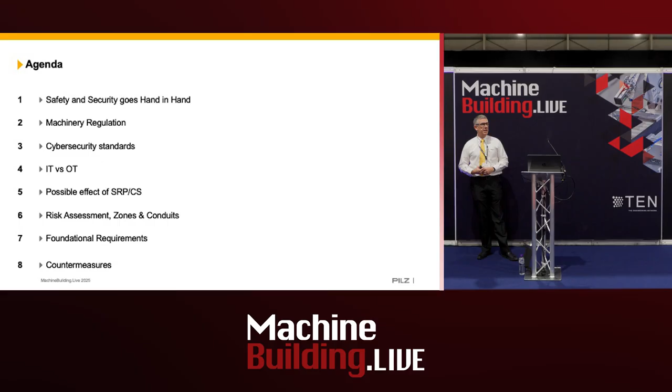So safety and security. Security vulnerabilities really enable machine safety to be manipulated. And we're all familiar with machinery safety and how that protects your staff from hazards due to the machinery itself. But now we need to look at security and protecting your machine and data from manipulation from unauthorized access, so from people.

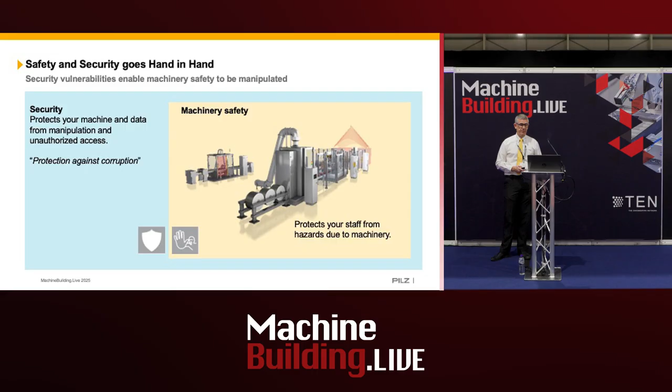And we need to look at security in two different ways. So we need to look at the physical security. So that's protecting the machine from personnel. So how do we protect unauthorized people gaining access to the machine through gates, covers, flaps, or through HMIs, for example. And then finally, we need to look at information technology security, which is protecting the industrial devices and data from attackers. So, for instance, from outside attack.

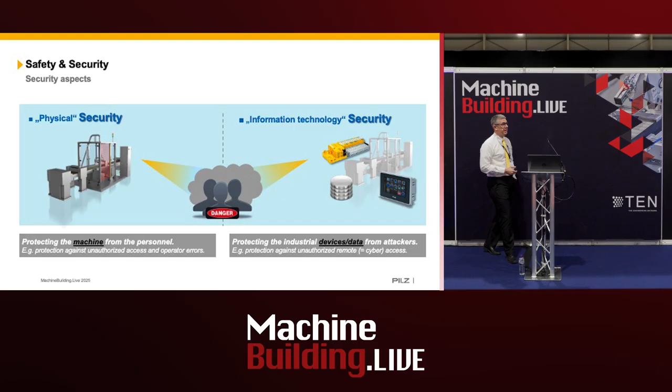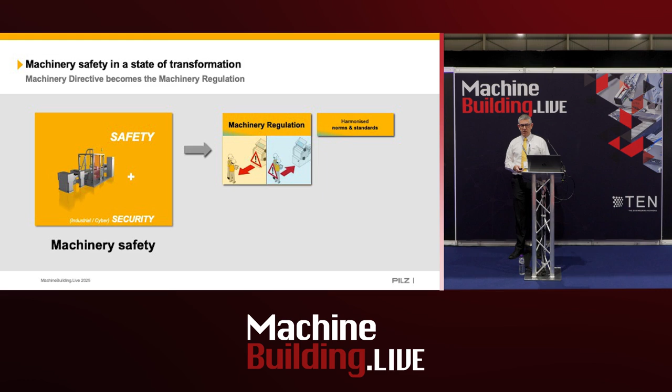Machinery regulation. So we're familiar with the machinery directive. That's now becoming a regulation, and we achieve compliance through harmonized standards. But now with the introduction of the machinery regulation, that now incorporates industrial cybersecurity. And as a result of that, there's around 600 to 700 standards that we need harmonizing to allow us to achieve compliance from the 20th of January 2027.

So how's that process happening? Some of the main changes from the machinery directive with the regulation is we need to look at protection against corruption, and there's a focus on functional safety standards and the functionality of safety with regards to security. We can do that at present by looking at 13849. So there's some requirements there for access to functional safe controllers. It puts an emphasis on the skills of new employees, and it talks about access for qualified personnel only to the controller.

We have what we call NIS2, the Network and Information Security Directive. As it currently stands, that looks at just what are called essential entities, so like water, gas, utilities. But it now incorporates what we call important entities, which are employers of more than 50 people, or with a turnover greater than 10 million euros as an example. And what that does is it looks at measures for managing cybersecurity risks.

And then we have the Cyber Resilience Act, and that puts an obligation on manufacturers of products with a digital element. So, a company such as Pilz, if we manufacture a product and we can see that there's vulnerabilities with that, we need to be able to communicate that to the marketplace and make them aware of those vulnerabilities. But more importantly, how can you mitigate against those?

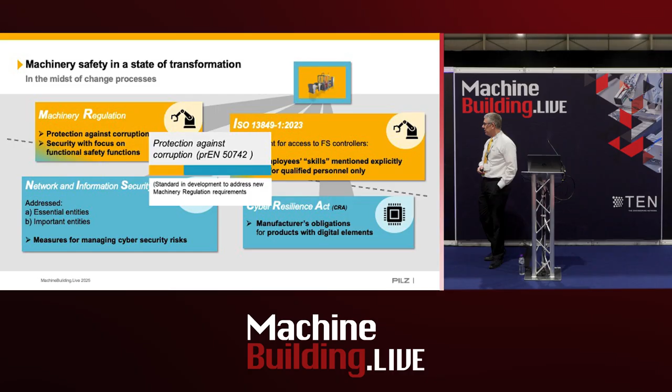And finally, another standard that's in the process of being written is protection against corruption. And that is EN 50742. And that addresses the requirements of protection against corruption to achieve compliance to EHSRs for the machinery regulation.

So what are the most significant changes really concerning security with the machinery regulation? AI is not mentioned specifically in the regulation. It talks about the inclusion of so-called emerging digital technologies, but it's quite clearly recognizable through those terms. It's got the inclusion of cybersecurity and associated safety requirements. We have the requirements for human-machine interaction

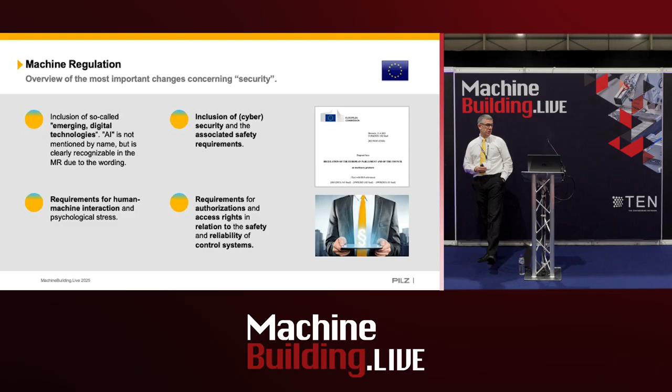and psychological stress. So it's down to manufacturers to try and make the usability of HMI interfaces, etc., easier to understand and interface with. And then there's requirements for authorization and access rights, which are in relation to the safety and reliability of control systems.

So the key changes are AI technology. There is no direct reference to the NIS directive, and that's quite important, really, because obviously the UK is not part of Europe with regards to the regulations with Brexit, and the UK government has already said, I believe, they won't take the NIS directive on board. So as a result of that, a lot of people believe that we will fall in line with the machinery regulation, the changes that come about, and that would have proved an obstacle.

We have to look at protection against corruption, and what the machinery regulation states is that the machinery product shall collect evidence of a legitimate or illegitimate intervention in the software or a modification of the software installed on the machinery, and that's its product or its configuration.

And that's to do with the EHSR 1.1.9. And then if we look at 1.2.1, we look at the safety and reliability of the control systems. And it says that they can withstand malicious attempts from third parties, shall not lead to hazardous situations, shall be protected against accidental or intentional corruption.

So it's quite important there, because what we're talking about is not just somebody in their bedroom trying to hack into your system or a state-sponsored attack. It could even be an employee that makes a mistake. So, I may have seen John clear a blockage using the HMI last week. Same situation happens this week.

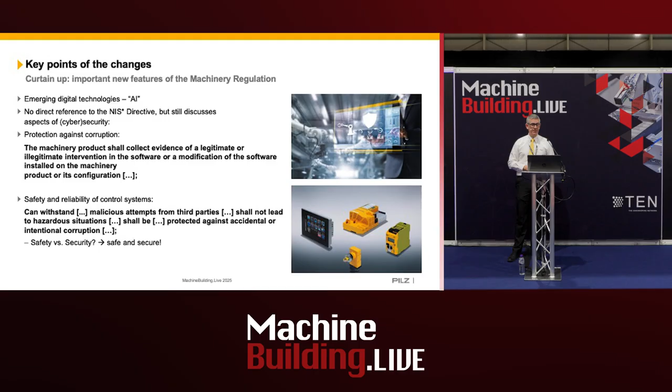Just some other requirements from Annex 3. So connection of additional equipment must not lead to loss of a safety function. So if you've got Wi-Fi connection, if you've got other Ethernet ports, etc., that are on the machine, remote access devices must not affect safety. Hardware components that are important for connecting and accessing safety-related software must be adequately protected against unintentional and deliberate corruption. I'll stress that point again.

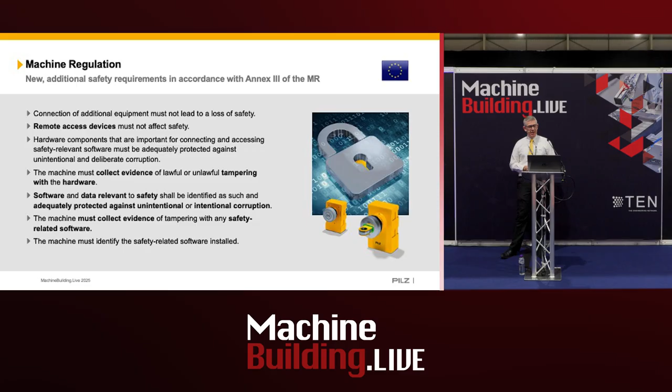The machine must collect evidence of lawful or unlawful tampering with the hardware. It doesn't go into detail about how it will do that, whether it has to be electronic or paper, etc., but that's stipulated. Software and data relevant to safety shall be identified as such and adequately protected against intentional or unintentional corruption. The machine must collect evidence of tampering with any safety-related software, and the machine must identify the safety-related software that's installed.

So the conclusion to the regulation is that at Pilz, we interpret the regulation to mean that it's mainly about protecting the machine from a security point of view. So it's via security measures. And as mentioned, from January 2027, so it's from the 20th of January, manufacturers of machinery must ensure that the machine complies with the machinery regulation, which will mean that it also must include aspects of security. And if it fails to do that, then your machine would no longer be CE compliant.

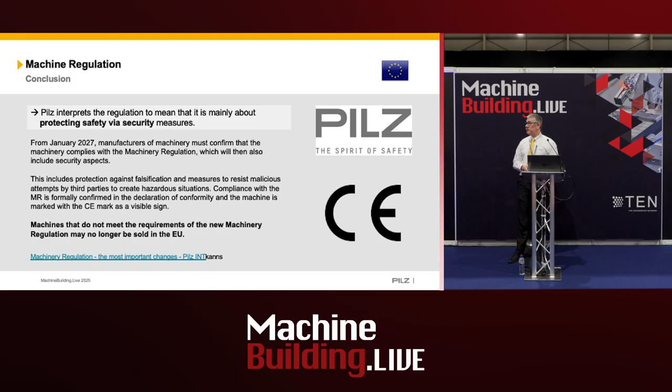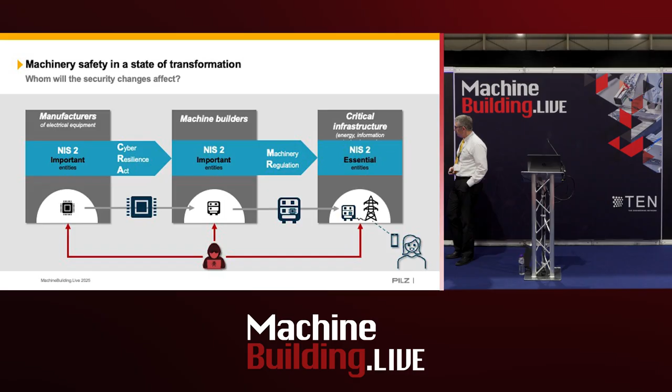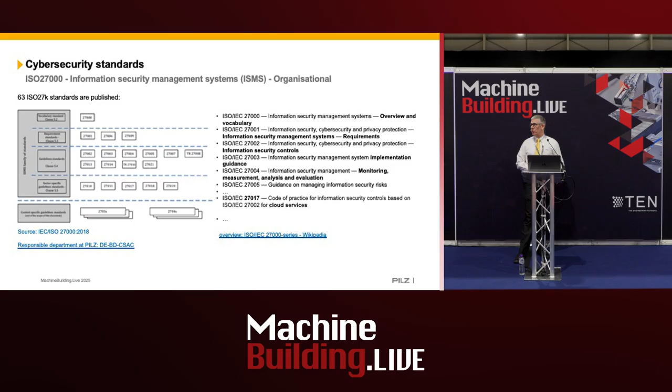So what standards can we use? So for cybersecurity, there's two that we generally use at present. We have ISO 27000, and that really is around information security management systems. So it's organizational. What kind of industrial information security management systems should we have in place? What kind of guidance do we have for implementing those? What kind of monitoring, measuring, analysis, and evidence collation do we have within the organization? What kind of training do we give to our employees to ensure that there's compliance, etc.?

And then we have IEC 62443, which is security for industrial automation and control systems. And that's really around the application and the product. And again, you can see here, depending on the part, it's broken down to component, product, and factory.

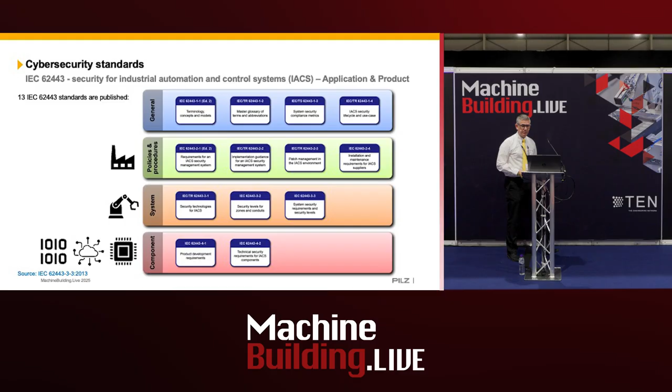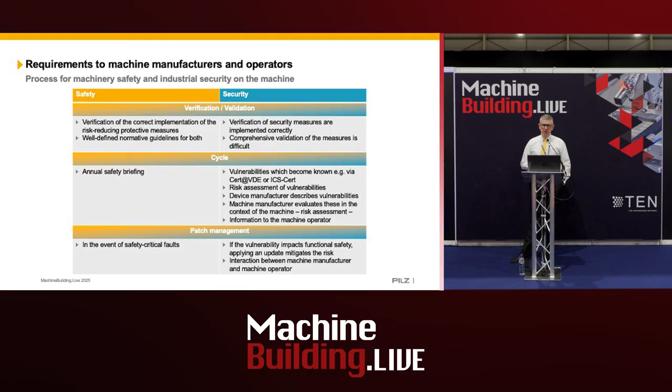You'd have to risk assess them. You'd have to look at device management for your machine. There'll be more communication between the OEMs and the end users themselves, because you're going to have that dialogue as vulnerabilities are known. Then you've got your patch management. So that's really in the event of a safety critical failure on a machine. Whereas for security, if a vulnerability impacts the functional safety, then you're going to have to apply any mitigating risks against that. And so, like I say, there'll be more interaction between the machine manufacturer and the operators.

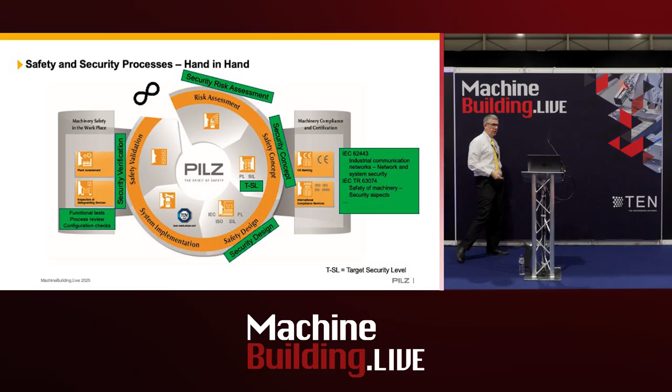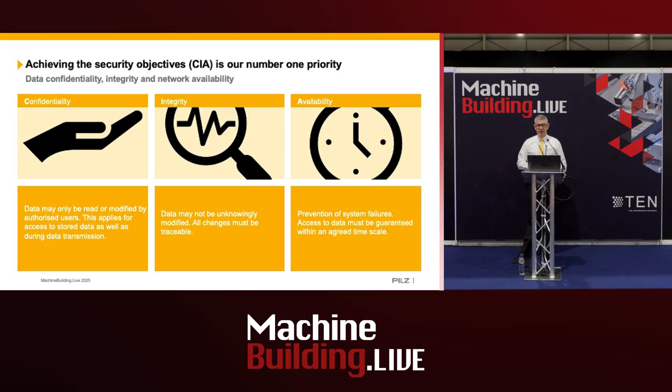So, differences between IT and OT. We're all familiar with the IT network, with the operational network. We kind of do what we call the CIA method. So we look at confidentiality, integrity, and availability. So for confidentiality, we want to ensure that our data can only be read or modified by authorized users. Integrity, data may not be unknowingly modified. And then for availability, we want to prevent system failures. And depending on whether you're in an IT or an OT network, that's going to change. Your priority is going to change.

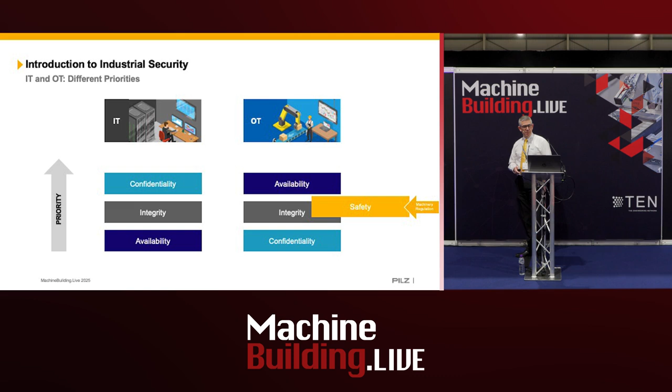Typically for IT, you want to make sure that you've got your confidentiality. You want to make sure you're GDPR compliant, etc. Nobody's going to take any of your IP, for instance. The last one's typically availability. If a laptop fails, for instance, or a printer fails, you can just go and get another laptop, and set that up quite easily. When it comes to OT, it's kind of reversed. Availability generally is the highest priority because you can't go and just get another production line out of the stores. You need to make sure it's always available. And then integrity and confidentiality you can change depending on your circumstance. But what we also have then is the introduction of safety.

So what are the possible side effects? So if this is our safety control system, if we look at the security, there may be a threat. And if that's exploited or succeeded, that would lead to a vulnerability. If we look at that vulnerability, that would have a consequence. It might be on an asset, so that could be a component or a human. It may be that there's loss of business, there's business interruptions. You just have to look at Jaguar Land Rover, for instance. Or it could lead to a security risk to the safety control system.

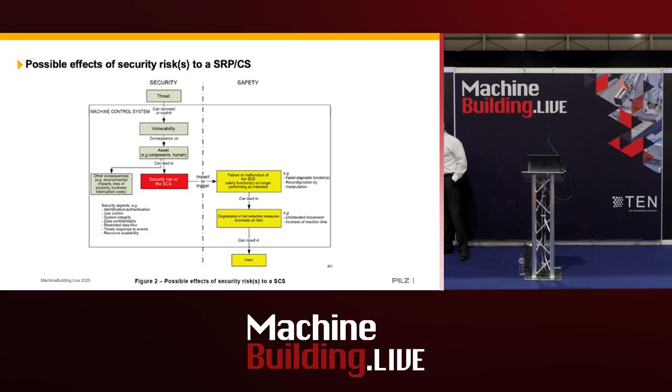And if it does that, then it goes over to machinery safety, and we could have a failure or manipulation of the safety control system, i.e. the safety functions are no longer performing as intended. That could then lead to degradation of the risk reduction measures. So it may be that we've blanked the light curtain, for instance, or we've made its stopping time longer, and that could have a consequence and lead to harm.

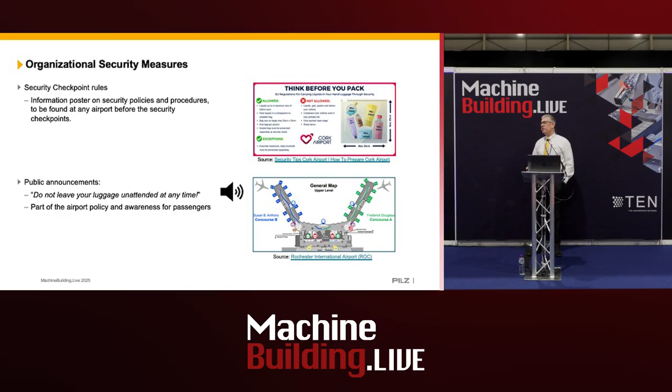So how do we overcome this? So we'll do that with zones and conduits, and I'll use the analogy of an airport. So we're all familiar with going on holiday through the airport. Normally, before you get there, you'll get all the rules of what you can and can't take. There'll be security checkpoint rules. There'll be public announcements. These are all familiar and examples of 27000. These are all the management side. It's all information.

Then we have the physical security measures, which are kind of in line with 62443. So we'll have video surveillance, regular police patrols. You'll have your identification and authentication. So at the ticket counter, am I the person to get on the flight? Do I have a ticket?

At the border control, who am I? Am I allowed to leave or enter the country? At the boarding gate, am I allowed to board the plane? And if I'm airport staff, do I have a card that allows me access to restricted areas?

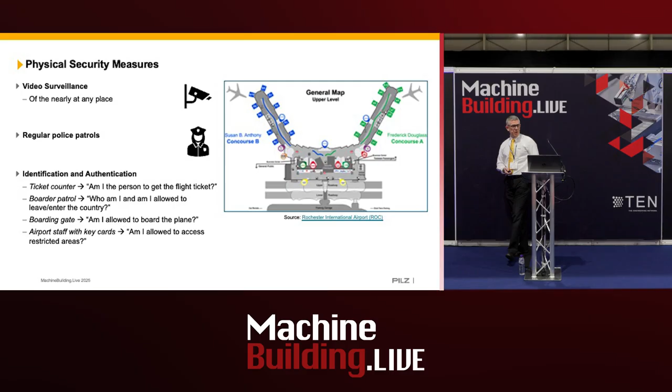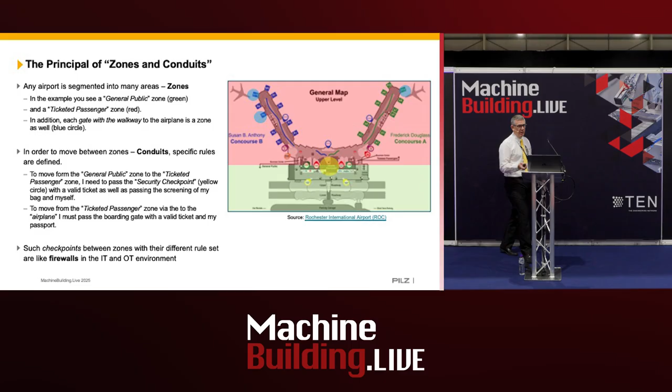So any airport, really, we can segment into zones. So we've got the green zone, which is our general public area. So that could be the departure. Then we've got our red zone, which is the ticket zone. In addition, each gate, we've got a blue circle and a blue line, which indicates where the gates are. And in order to move between those two zones, we have to create conduits. And these will have specific rules that are defined.

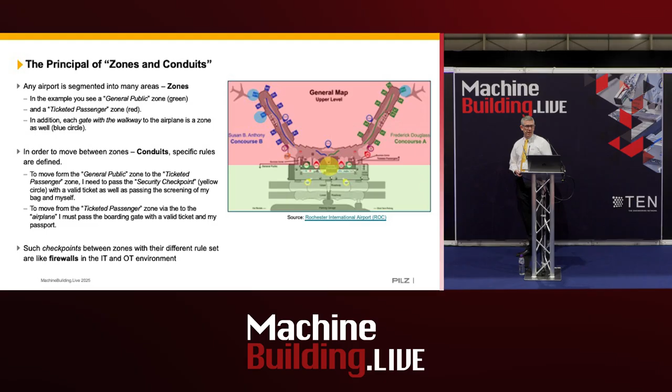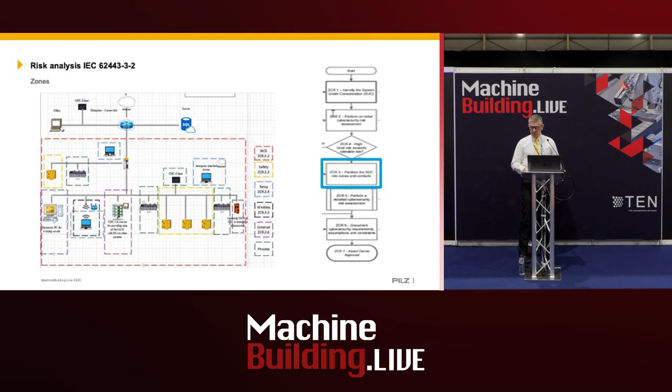So an example, to move between the green zone to the red zone, I need to pass the security checkpoint, which is in yellow, and I need to have a valid ticket. I need to be able to go through the screening. I need to have a passport, etc. And such checkpoints between these zones, with their different rule sets, are like firewalls within our IT and our OT environment.

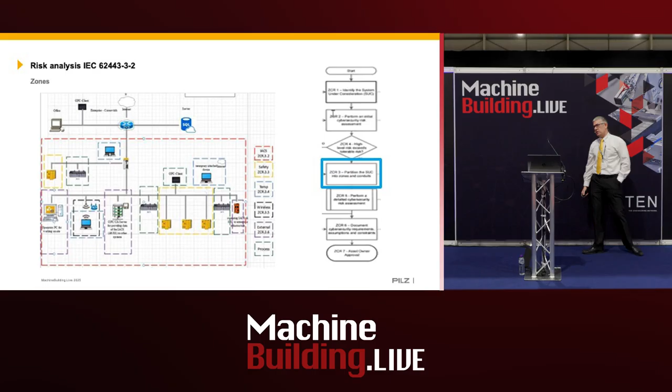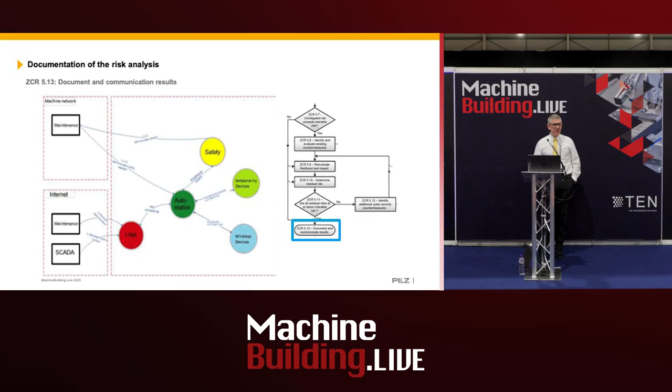So if we look at what we call our system under construction, this is our IT. Everything in the red box we're going to have as our OT, and we're going to start to group all of our components together. So we put all our safety in yellow, let's say. All our industrial automation we might put in blue, all our Wi-Fi in black, for instance. So we'll start to create those zones. Then we'll look at the communication between those zones, and we'll carry out a risk assessment, which I'm not going to go into, to define what kind of control measures we'd put in place.

An example of such would be here: you've got a HMI, you've got a functional safe controller, you've got your automation network here. We're going to zone it, so you can see green for automation, yellow for safety, blue is for external ports. We've got a firewall from the outside IT network.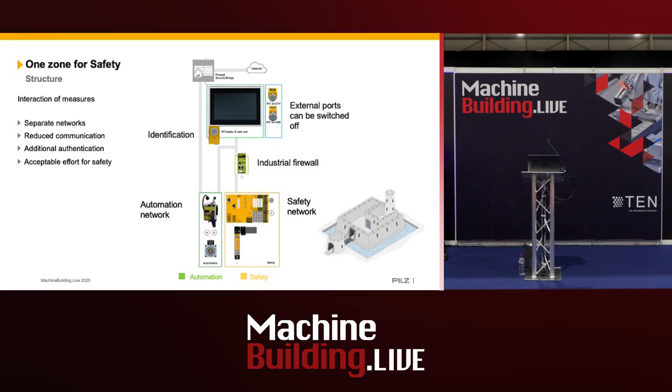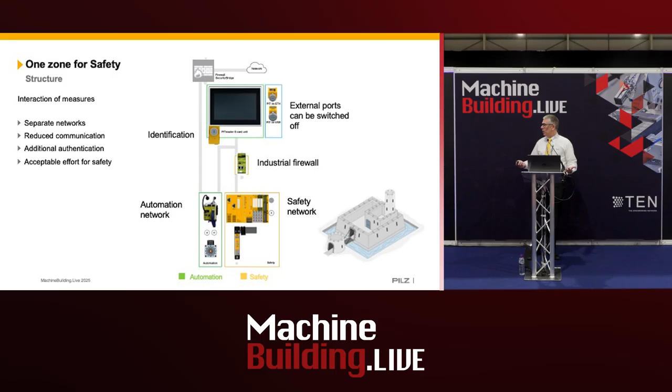But if you want to gain access to your functional safe controller, so you want to prevent manipulation, the only way to do that is with an RFID key, and that would allow access through the HMI, the USB ports. You can't gain access via the HMI to the controller, which you potentially could because it's on the same network, unless you've got the right protocol through the firewall. There's a lot to go through there. So we're separating our networks, we're reducing the communication, we've got additional authentication, and it's kind of an acceptable level, really, of effort for the safety.

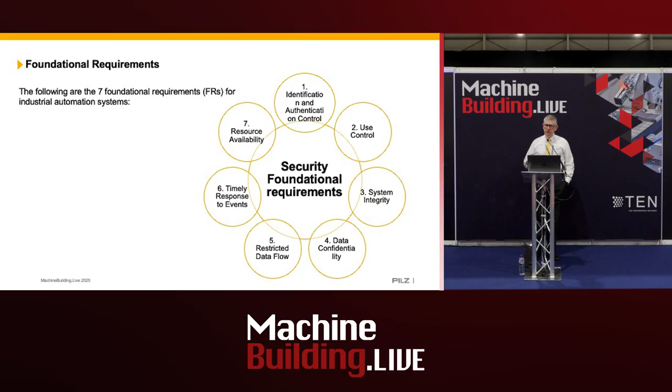What I've just shown you really are what are called foundational requirements to IEC 62443. And really, there's 7 of those. Identification and authentication is one. Use control, system integrity, data confidentiality, restricted data flows, so like firewalls, VPNs, timely response, and then resource availability.

And our countermeasures really are, well, I imagine it is very much like if you had an access gate to a machine, you may have a light curtain or an interlock on there. That's the way you mitigate your risk. These countermeasures are the way that you'd mitigate your security risk. And so we have what are called safeguarding supportive systems.

And what a safeguarding supportive system will do is it will identify who the authorized personnel is. You've got verification that the authorization for the selected tasks matches the identified personnel. So if they're going to change a program on the HMI or gain access to the machine, you can verify that. You inform the user of the authorized task, enable the mode of what we call safe operation. So if you want to change the machine from a run mode to an inch mode, and then you can specify the zones to which authorized personnel have access.

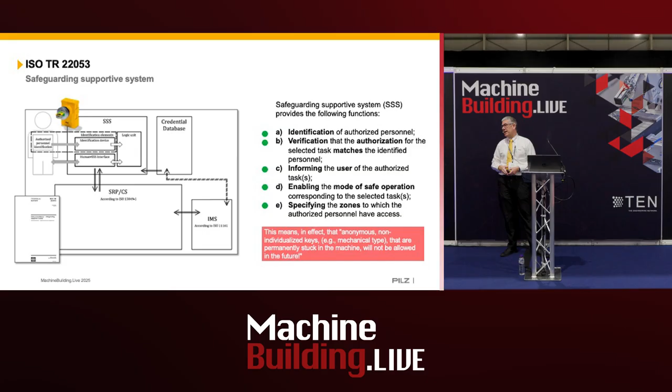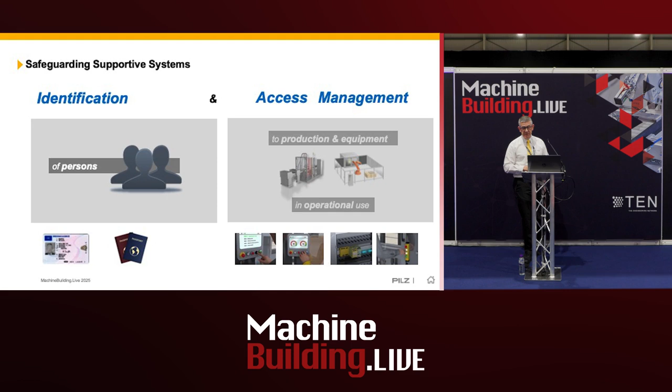And what this effectively means is that anonymous mechanical keys that are typically left in a panel where you're having a run mode, an inch mode, a test mode, will be phased out because you've got no way of being able to identify and authenticate who is doing that task. And so to give an example of safeguarding supportive systems, it's basically like a passport or a driving license. You identify who that person is, what are their responsibilities, what's their training, etc., the competency, and then you've got the access management.

So it's a way of being able to gain access to HMIs, safety PLCs, doors. You've got safe operating modes, machinery safeguarding, so you could log personnel in, like intelligent lockout, and then you've got your machine security measures. And I'm close for time, so I'll show you some examples.

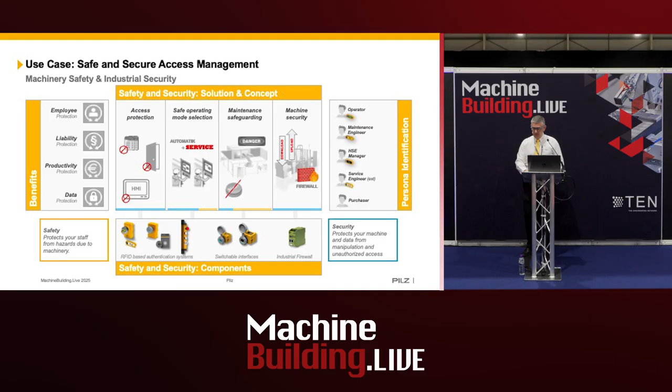So here's a typical panel. You can see you've got your key trapped in the panel. You've got your USB and your Ethernet ports at the bottom. So you've got no way of identifying who's doing what to the machine. Key's always inserted. You've got direct access to USB and Ethernet ports.

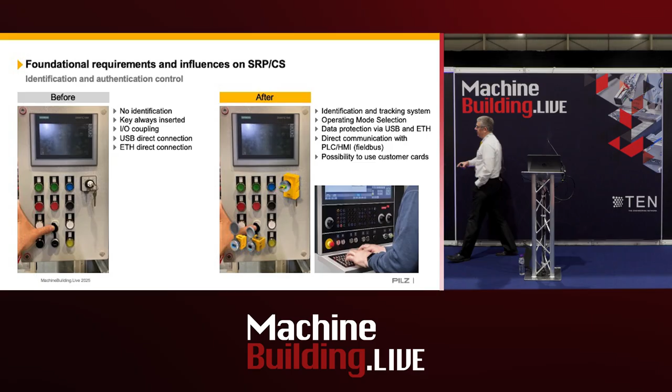And so a way of being able to mitigate that is afterwards, you'd have a remote RFID key that's defined to each user with all your permissions. And if you've got the right permissions, it would allow you to enable these USB or Ethernet ports or change the mode of the machine. If you're not trained, it wouldn't allow you to do it.

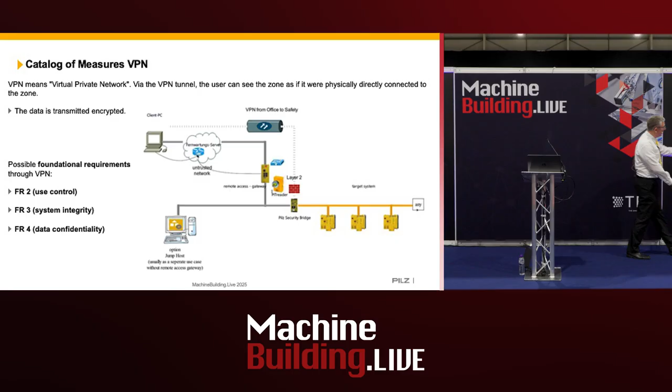Another example would be remote access to a machine. So you can see we've got a client PC that could be in Spain. This could be our machine in the UK. They've got all the correct VPN protocols to gain access, but we've got an additional layer of protection with a firewall and a VPN. And we're using our key here. So once I've verified who this person is, if they're authorized, I'd put my key in and allow them access to the machine. When I remove that key, it removes their access.

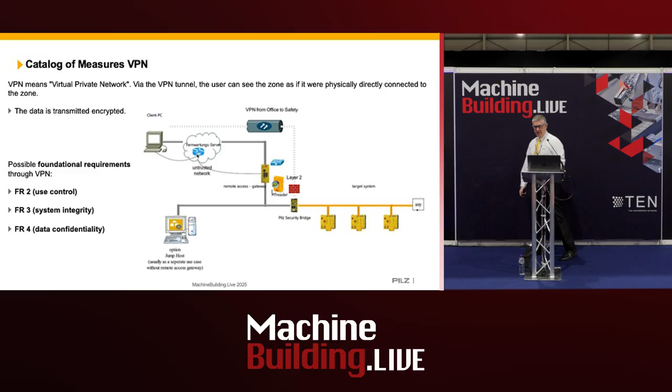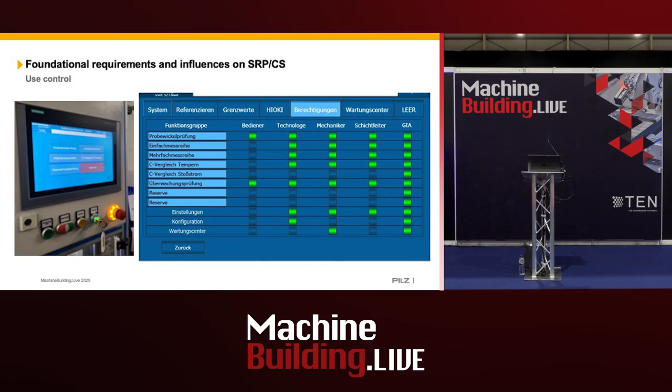And then finally, this one's to do with access to the HMI. So depending on my skill set would depend on what I can actually gain access to on the HMI. So when I put my key in, everything in green here I've got access to, but other parts I haven't because I'm not trained, competent and authorized to use it. And that would depend on your competency.

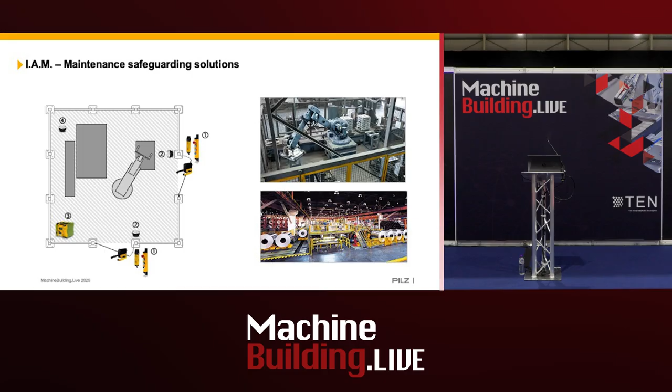And then if you wanted to gain access to a machine, you'd be familiar with mechanical trapped key. With this, you'd put your key in, you'd log yourself in, you'd go in, and you could leave through any door, but you can have multiple logins. So the more people that go in, the more you log in, and only when the last person comes out would you be able to reset and start the machine.

Any questions? There's quite a lot to take in a short time. I didn't say I could answer them, but go.

Could you just clarify what's happening with the UKCA marking? You mentioned CE marking. Yeah, so with UKCA and CE marking, I think it will be very similar to when UKCA marking first came out, that we'll get a notification on the 19th of January 2027 that says we're going to do it. But as far as I understand, there's legislation going through Parliament that gives the Secretary of State powers to mirror EU regulation. And so if that happened, then we could just mirror the EU regulation.